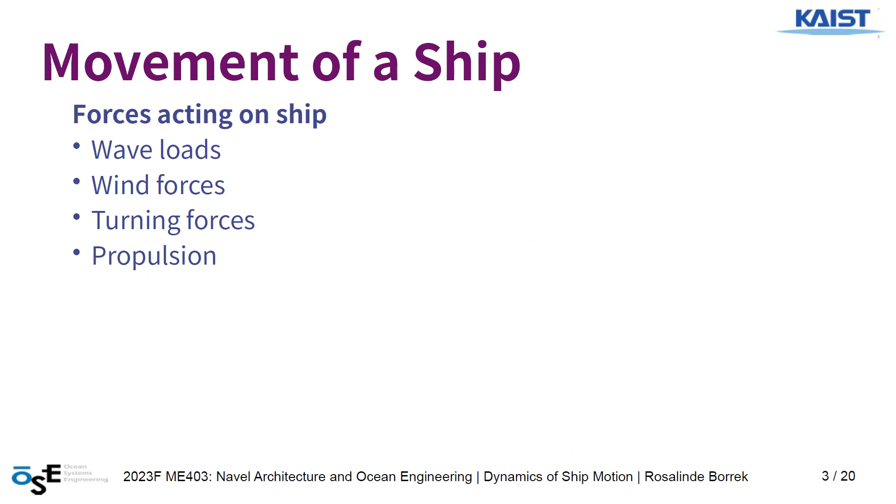Then the ship itself has certain parameters like its shape and its size and its weight. And all of those have an influence on the location of the center of gravity and also on the center of buoyancy, which we already learned earlier this week, that those two parameters are very important when it comes to how a ship is moving and how a ship is stabilized. So those factors influence how those forces make the ship react in a certain way.

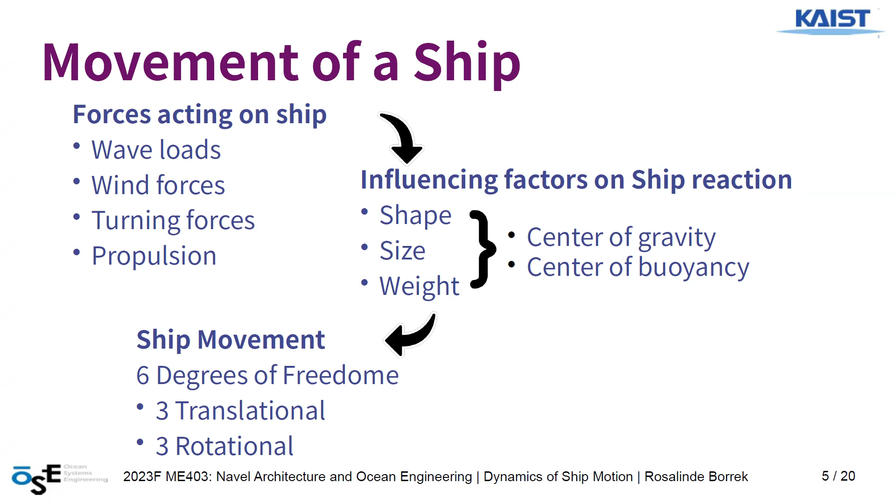And then in the end, we have the movement. The ship in the end is also just a 3D object, and as every 3D object, it also has 6 degrees of freedom in which it can move. So 3 translational and 3 rotational. And of those, I want to talk a little bit more now. But first, we have to define a reference axis so we can do that.

Now, for the origin point of the coordinate system that is mostly used, I saw some different literature. Some seem to use the center of gravity for the origin point. Some use like a very specific point within the structure. But then the axes were all defined in a similar way.

As in the x-axis, the longitudinal axis goes through the length of the ship, parallel to the waterline, while the y-axis or the transverse axis, or sometimes also called lateral axis, goes perpendicular to that, also obviously parallel to the waterline. And it is also defined that the positive y-axis side is the port side and the negative y-axis side is the starboard side. And then the z-axis is obviously the vertical axis going up.

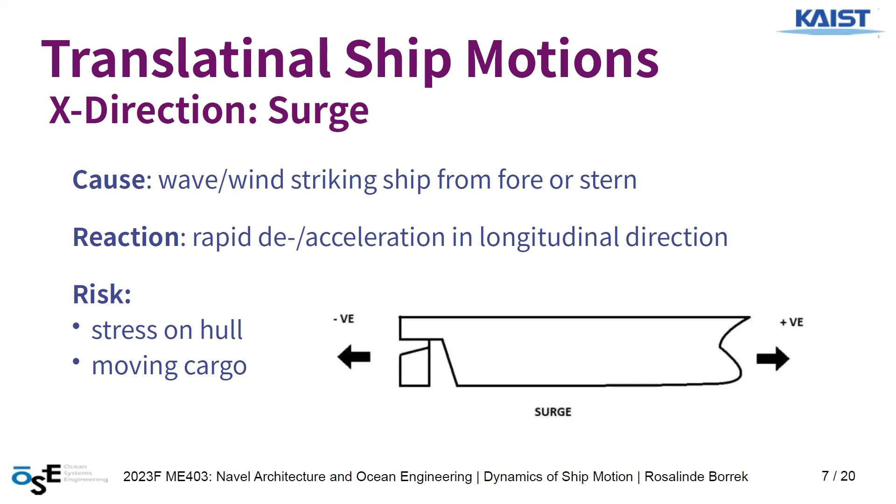Now we come to the motions. First, translational ship motions. Ship motion in x direction is called a surge. And it is mostly caused by wave or wind forces that are striking the ship from the fore or from the stern. And the reaction of the ship is then a rapid de- or acceleration in a longitudinal direction. And the risk of those motions is that it can cause a lot of stress on the hull. And it also can move cargo around if it's not secured properly.

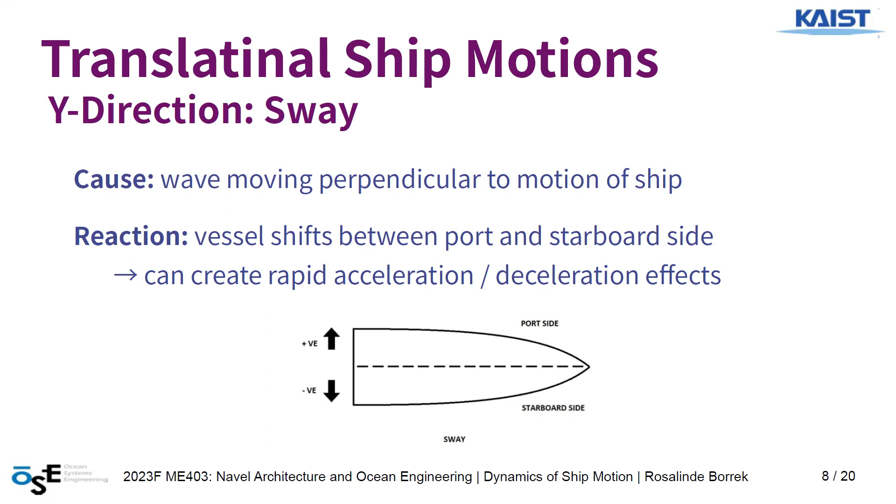Then translational motion in the y direction is called a sway. And this happens if the wave is moving perpendicular to the motion of the ship. And then the vessel will start to shift between the port and starboard side. And this can also potentially create rapid acceleration or deceleration effects.

Then we have the motion in z direction, which is called the heave. This happens when a wave strikes the ship along its path of motion, and it can create a force imbalance between buoyancy and weight. We already heard a lot about that in the last lecture. This then creates upward and downward motions of the ship. And again, similar to the surge, this can also create a lot of stress on the hull and also move around cargo that is not supposed to move.

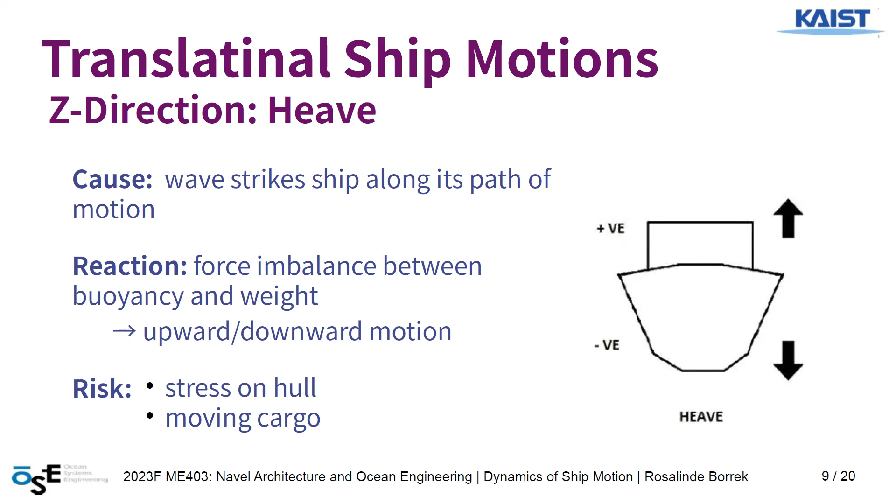Then we come to the rotational ship motions. First, the rotation around the x-axis is called rolling motion. We also already learned a lot about that in the last lecture. It can be caused by waves moving perpendicular to the ship motion, by wind forces, by cargo shifting, by a hard over of the rudder. A lot of different things.

The result is then a side-to-side rolling of the ship, which in the worst case can lead to capsizing of the ship. It can also induce a lot of inertial forces on the ship structure. And in the case of a ship moving passengers around, it also has to be noted that this can lead to a lot of seasickness, which is not so nice for the passengers.

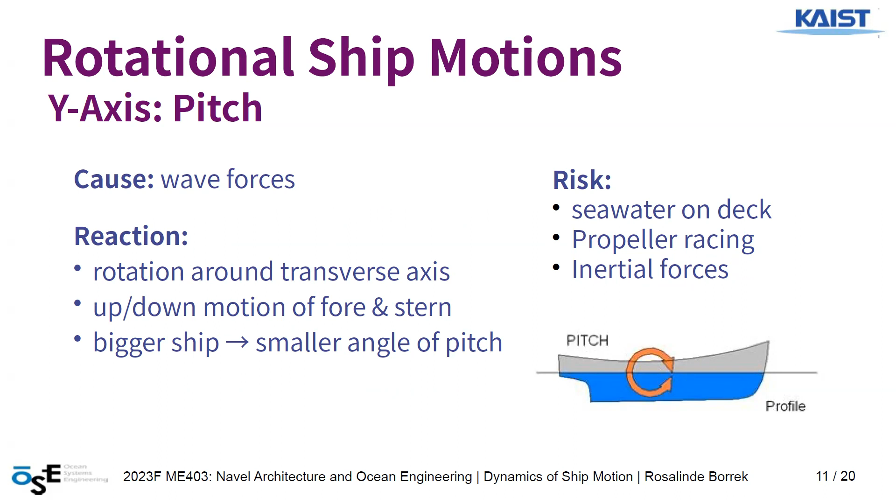Then rotation around the y-axis is called pitch. Again, this is mostly caused by wave forces. It is rotation about the transverse axis, which then creates an up and down motion of the fore and the stern. Generally, it can be said that the bigger the ship, the smaller the angle of pitch. It can lead to seawater on deck. It can also lead to propeller racing. And again, it can put inertial forces on the ship structure.

Then last of those, we have the rotation around the z-axis, which is called yaw. Again, the most likely causes are wave forces. Sometimes it also happens during vessel towing. The reaction is a spinning of the ship around its vertical axis. And since the ship then looks in a different direction, it can cause a course deviation, which you usually don't want because you want the ship to go in the direction you want it to go.

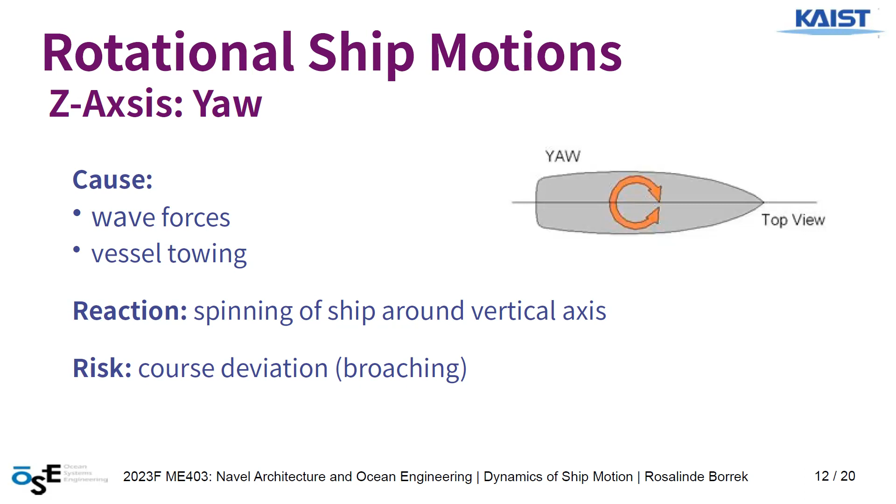Okay, those were the movements in the 6 degrees of freedom, but there are some other ship motions I want to talk about. One is hogging and sagging, and it happens if a wave moves along the length of the ship. As we also learned last week, at the top of the wave there's a higher buoyancy than at the bottom of the wave. So we have a different buoyancy along the ship's length, and this can lead to a curvature in the ship hull.

So if the wave is high in the middle of the ship and low at the bow and at the stern, we will have a hogging movement. And if it's the other way around, the waves are high at bow and stern and low in the middle of the ship, then we have a sagging motion. The risk is that the ship can start to oscillate between hogging and sagging quite fast, which can cause vibration, and this can lead to a lot faster material fatigue.

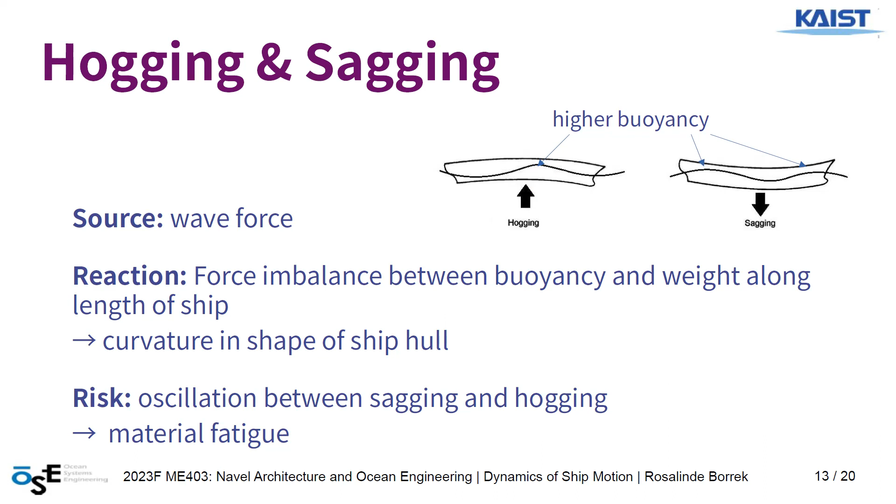And lastly, we have something called slamming, which again is induced by waves. What happens is that every time the ship strikes the water surface of the wave, there's a sudden deceleration. It can affect any side of the ship with heavy motion, but the most common form is bow slamming, when the front of the ship clashes with the waves again and again.

This can cause very, very high loads on the ship structure, and it has to be kept in mind when a ship is designed, because a ship has to be designed in a way that it can withstand those kinds of loads, even though they are not the standard loads that would happen on a ship.

Okay. Then I have a short summary of the effects different motions can have on the ship. First of all, motion always creates loads, and loads always have an impact on the structural integrity, then the material response, and lastly also on the stability, which is what Zian will talk about later.

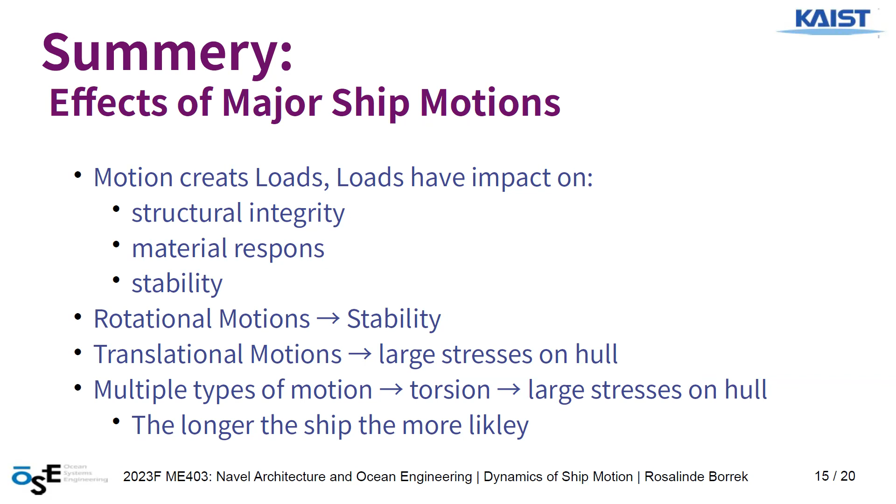Okay, then I want to talk very briefly about the topic of mathematical modeling of ship movement, because it is a very important topic. To be able to properly operate a ship, we need to know how it is moving and how it will react to different conditions. And therefore, simulation is a very important topic. Now, there are a lot of different models out there which do different calculations, ranging from kind of complicated to very complicated. So I cannot go over all of them.

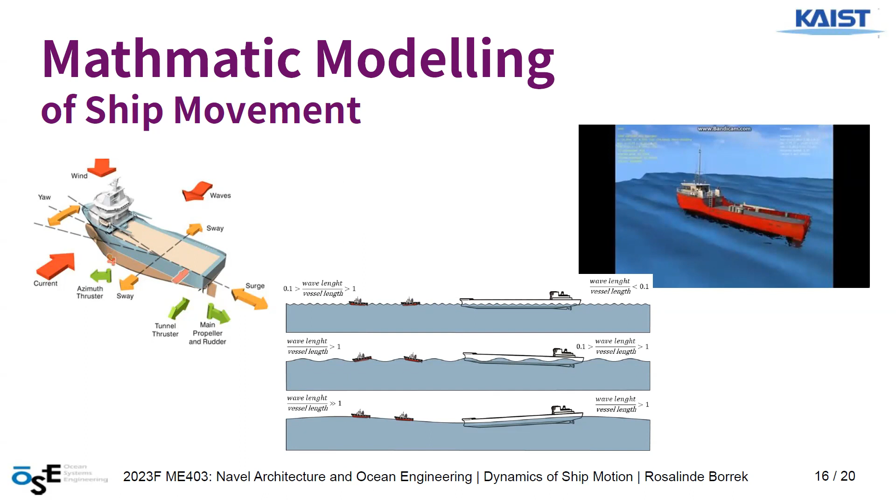The one I want to talk about right now is the MMG model. MMG stands for Maneuvering Modeling Group, which is the group that introduced this model. It was proposed in 1977 at the Japanese Towing Tank Conference. So it's not the newest model out there, but a lot of models are based on this model, which makes it still quite an important model. And there has been an effort to standardize the basics of this model.

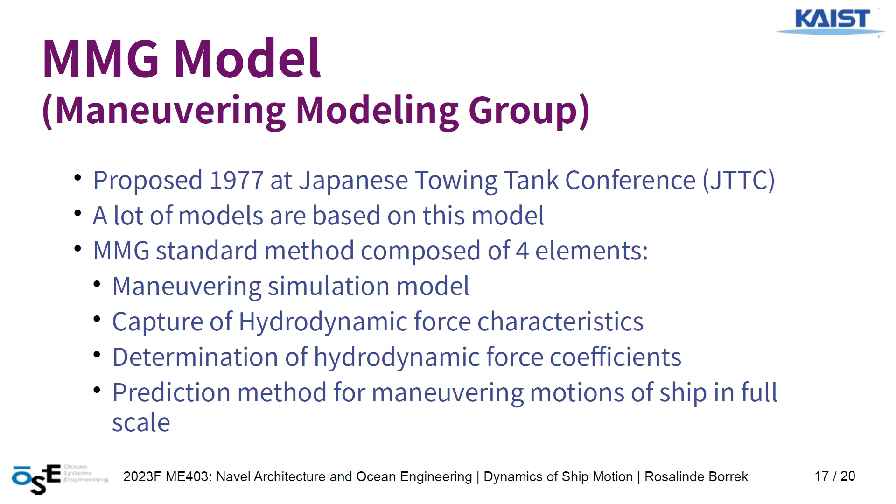The 4 elements of the MMG standard method are the maneuvering simulation model, the capture of hydrodynamic force characteristics, the determination of hydrodynamic force coefficients, and the prediction method for maneuvering motions of the ship in full scale, which brings it all together. Now, going over the whole model is a little bit much for this lecture, so I just want to talk very briefly about the core functions to explain the motions of the ship.

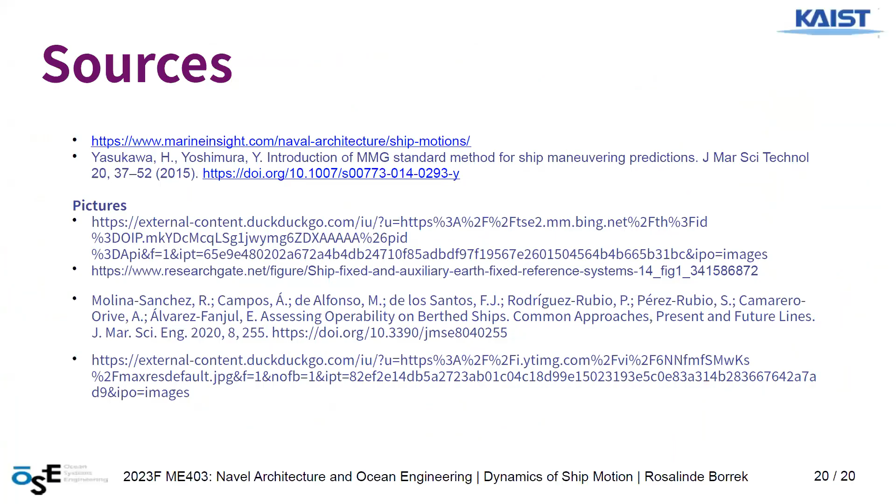From my previous lecture, small additional comments. One is about the equation of motion. This is very, very complicated, so let me show you. See, you remember this one from your mechanics? There is a spring mass damper system, right? You remember this one? And the equation comes like this one.

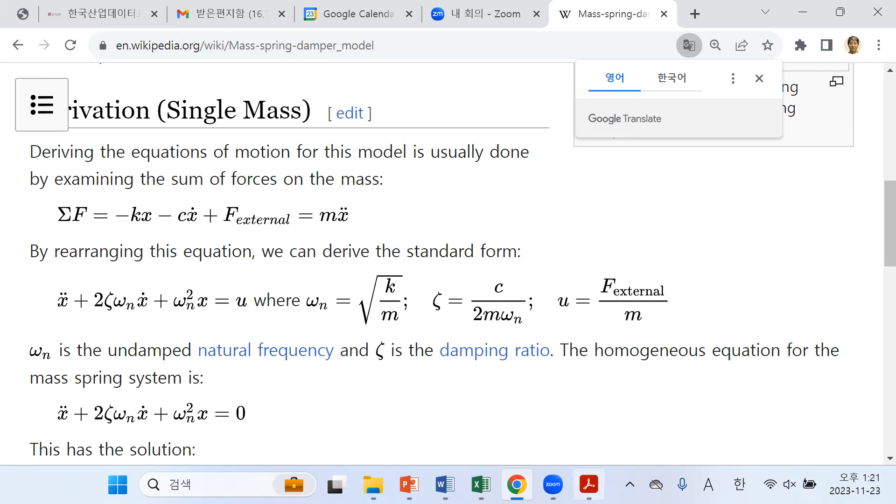Maybe another way. This is an inertia term depending on acceleration. This is a damping term depending on the speed, and this is the spring constant and displacement, right? And then external forces there. So if you move this one this way and this way, you can arrive at this equation. It looks like a complicated one, but this one is the acceleration term, this is a speed term, this is a displacement, and then external forces here.

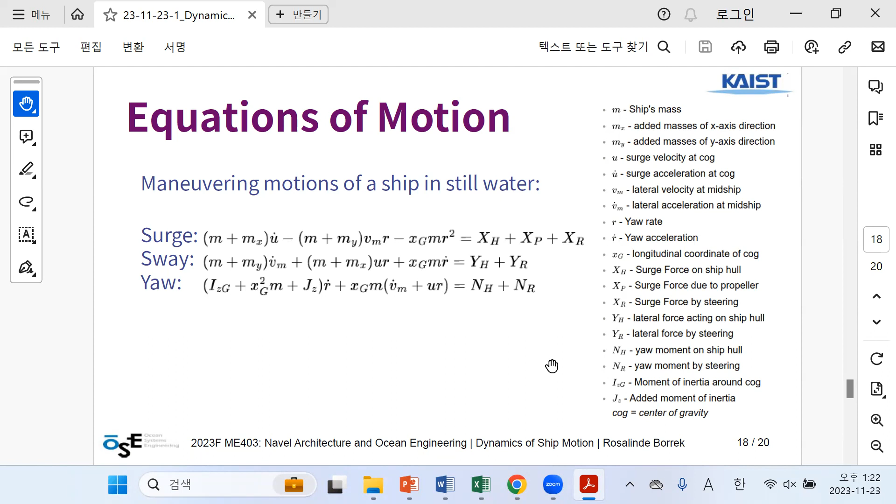Same structure of mass damping equation. It is for surge motion, this for sway motion, this for yaw motion. There are more because we have 6 degrees of freedom. But anyway, this is the inertia and mass term, this is the damping related term, and this is the spring constant term, and then external, that you can understand. In detail, it's a very complicated equation because a ship is big and complicated.

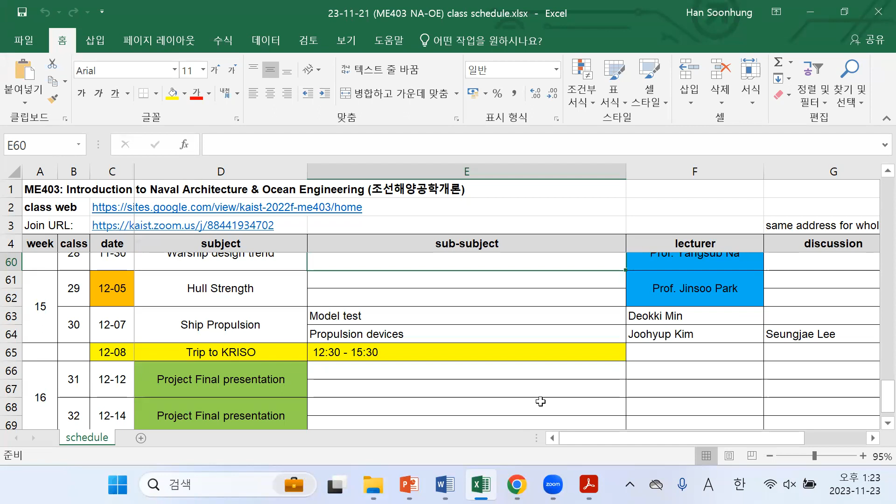All right, that's good enough. And then we can move on to Zeean. And we open this one. Right.

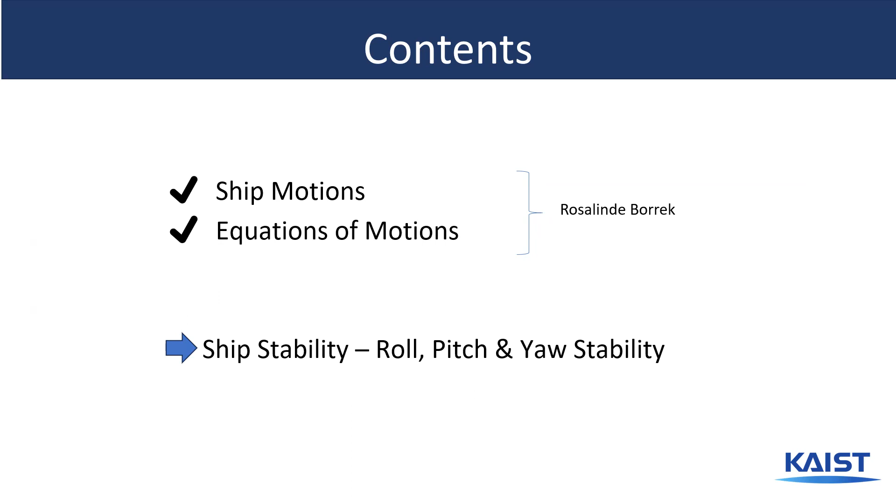Okay, hello everyone. My name is Yen, and today I'll be going through the second part of the lecture on dynamics of ship motion. Rosalinde has just covered ship motions and their equations. Today I'll be focusing on ship stability, particularly roll, pitch, and yaw stability. There are 6 types of ship motions: surge, roll, sway, pitch, yaw, and heave. We'll be focusing on rotational motions today: roll, pitch, and yaw.

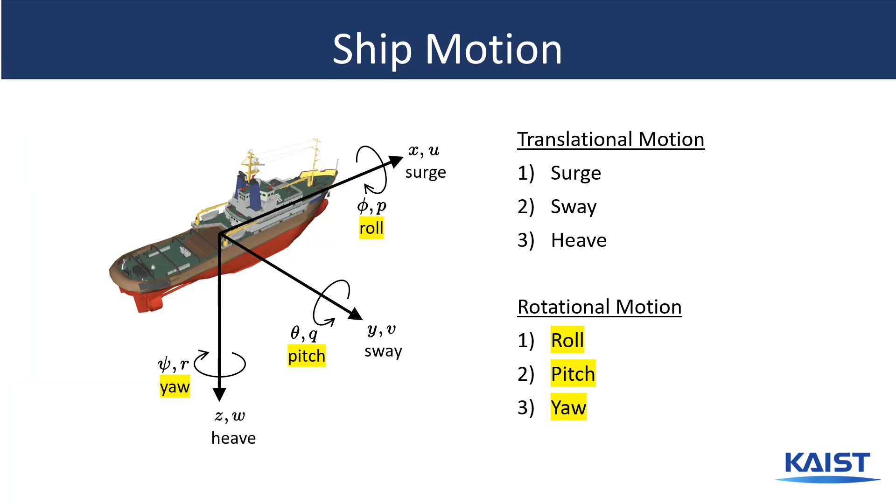So let's take a look at roll stabilization. A ship's roll is caused by the generation of greater buoyancy when the wave causes the water level on one side of the ship to be higher, causing the ship to lean to the other side. When you want to add a stabilizer to counter this roll, you need to look at how the tipping force is acting on the ship, and add a stabilizer acting in the opposite direction of the tipping force, and the magnitude of the force also matters.

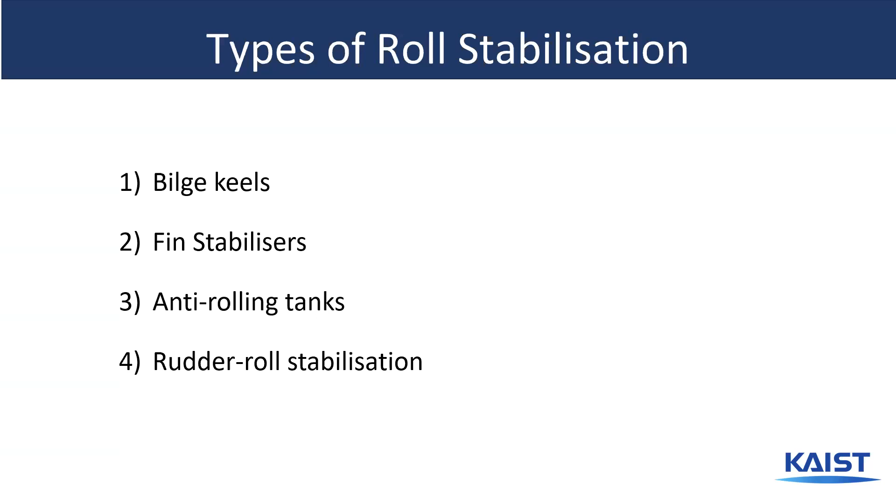These are some examples of roll stabilization methods: bilge keels, fin stabilizers, anti-rolling tanks, and rudder roll stabilization. I will go into more detail about these. First, bilge keels. They are a very simple design, approximately perpendicular protrusions at the bilges of the hull under the ship. When the ship is rolling and they move up and down, they create turbulence, which dampens the rolls created by the waves. This is a simulation to illustrate how the force is created by the bilge keels.

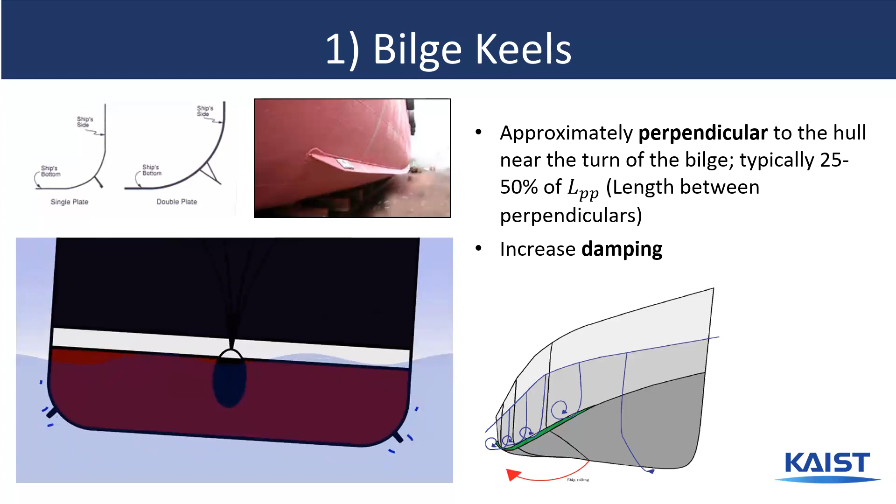The second method is fin stabilizers. They are underwater retractable or non-retractable wings at the bilges of the hull, and they can look similar to bilge keels; the difference is that you can change the angle of the fin stabilizer. In the simulation here, when we change the angle of the fin stabilizers, the water flow changes according to the direction the fin stabilizer is facing, and this creates the energy change according to that direction.

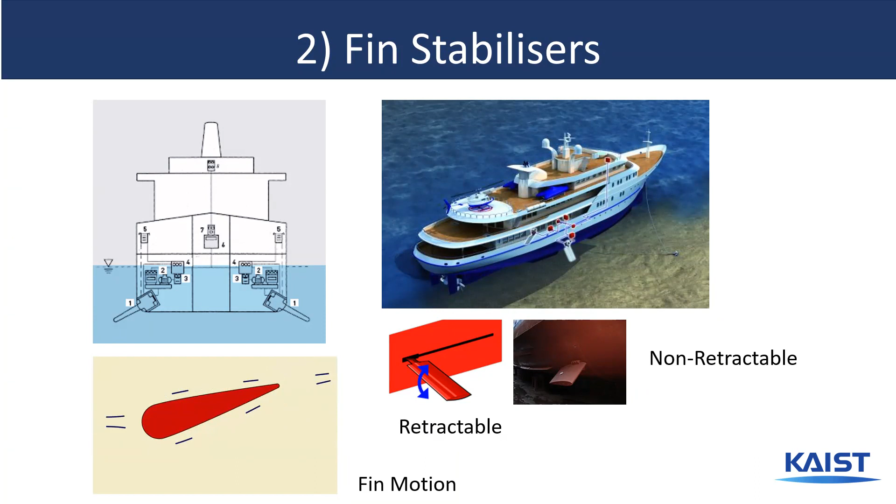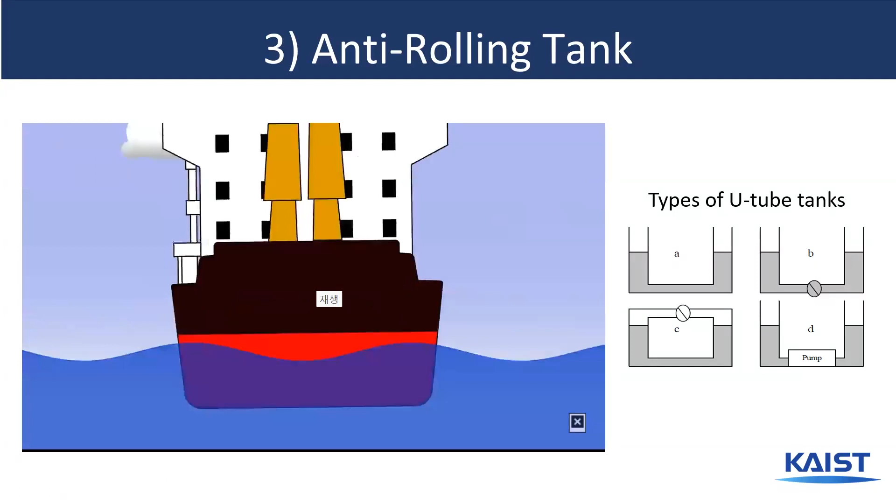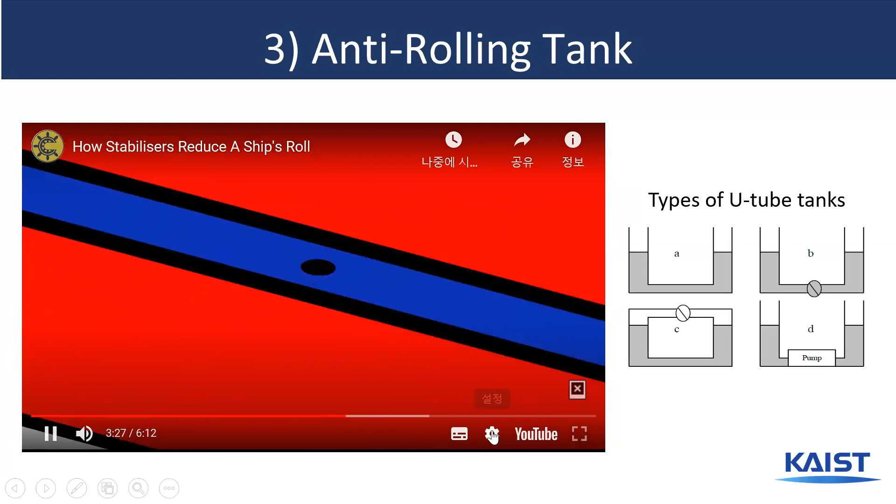Another method of stabilization is passive anti-roll tanks. These are tanks installed in the extremes of the ship's breadth. The key to these is in the design of the crossover pipes. Normally, with the ship upright, they're going to have the same amount of fluid on each side. As the ship leans over one way, the fluid in the low side is going to increase. If you can control the flow of fluid enough, you can have the maximum amount of weight.

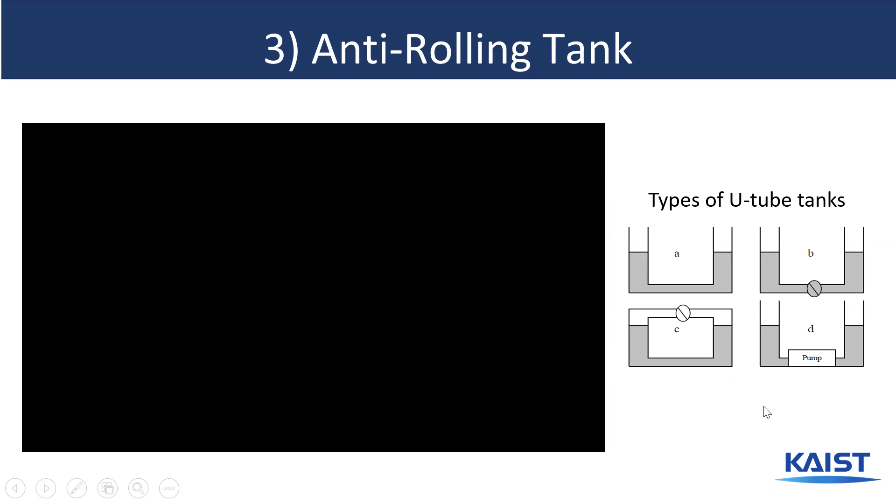Sorry. Hold on, give me a second. Okay, I will start again because it was very soft just now.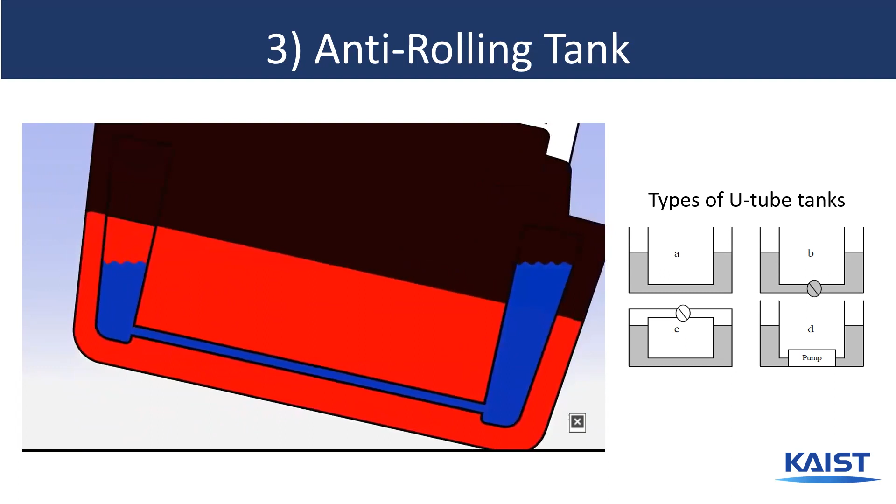Another method of stabilisation is passive anti-roll tanks. These are tanks installed in the extremes of the ship's breadth. The key to these is in the design of the crossover pipes. Normally with the ship upright, they're going to have the same amount of fluid on each side. As the ship leans over one way, the fluid in the low side is going to increase. If you can control the flow of fluid enough, you can have the maximum amount of weight in that side as the wave moves across the ship. Theoretically, if you keep the fluid there while the wave crest is there, it can help to counter the roll. Of course, you need to release it to let it flow to the other side at just the right time so that it's ready to counter the next wave crest as that approaches. You can add in more control onto these tanks, making them semi-active.

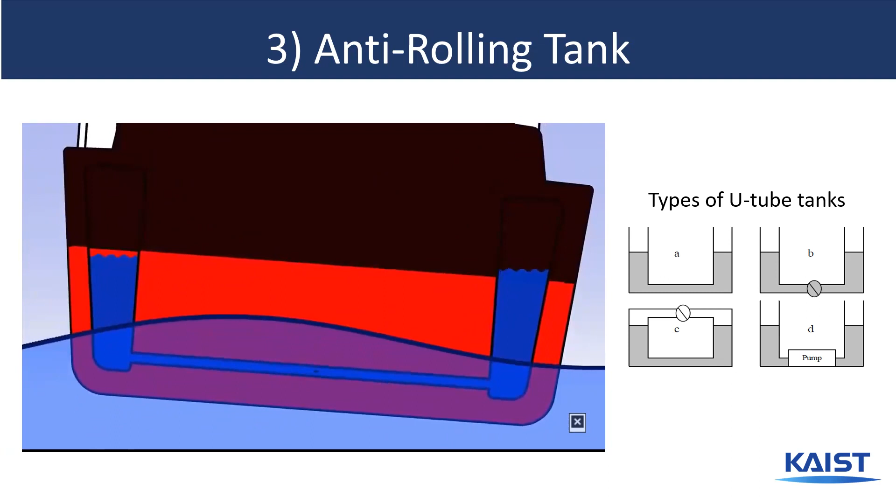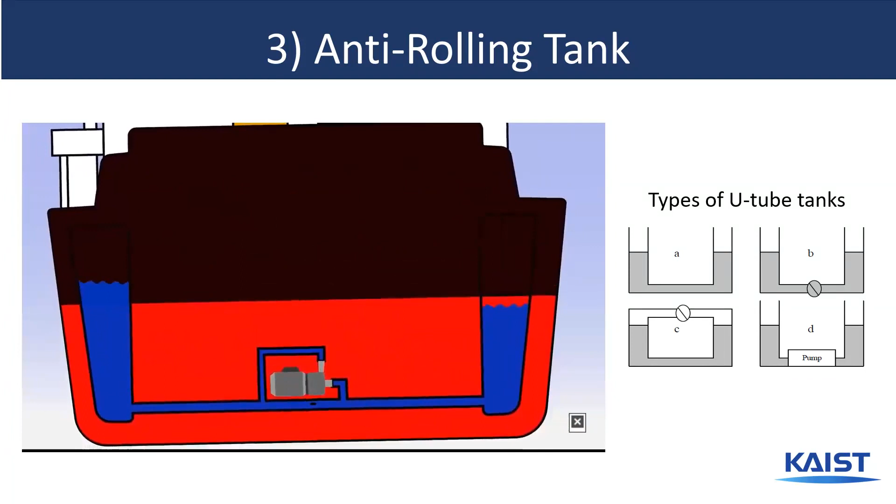Or you can even add in a set of pumps, controlled by a gyroscopic stabilisation system that can pump water across whenever it's needed. This would be a fully active system, and these sort of stabilisers are good on ships. They would work okay on cruise ships, as they can actively counter the force of the roll as it's happening. Unfortunately,

So the last but not least type of roll stabilization is rudder roll stabilization. It makes use of the movement of the rudder to create a roll moment which will counter the roll moment created by the waves to dampen it further.

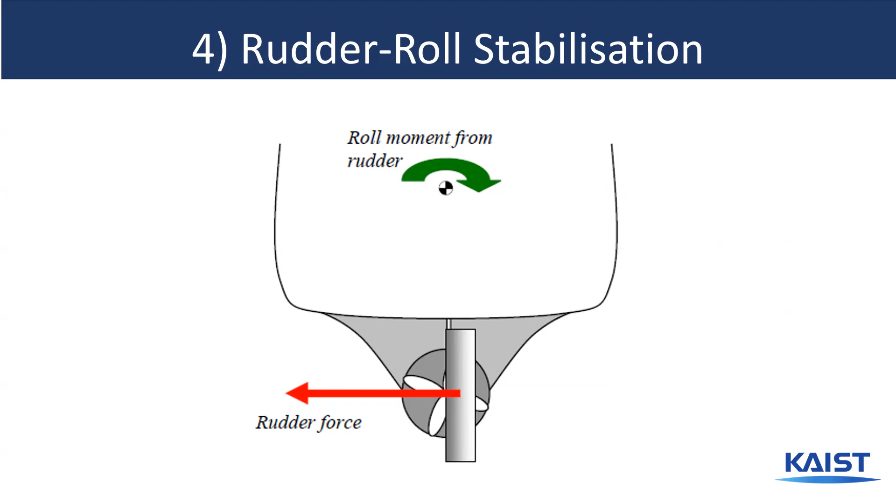So taking a look at these 4 types of roll stabilization and comparing their individual benefits and challenges. For bilge keels, they can be simple and inexpensive to install, but the disadvantage is that it increases hull resistance. For fin stabilizers, it can be highly effective in countering the roll motions of the ship, but it can only be effective at high speeds for ships, and it can be very expensive to implement.

For anti-rolling tanks, it is very effective at all speeds, but the challenge is that it requires a large space and weight to implement. And lastly, for rudder roll stabilization, the benefit is that it requires a relatively small space, but it is very ineffective at low speeds, same as the fin stabilizer, and it requires a highly capable steering system to implement. So each of these stabilizations have their own benefits and challenges.

So it depends on the type of ship, the size of ship, and also what speeds do they need in their course to consider what kind of stabilizer you need for that ship. But oftentimes, the stabilizer is already implemented for the type of ship. So they just have to choose the type of ship, and the stabilizer will be in the ship.

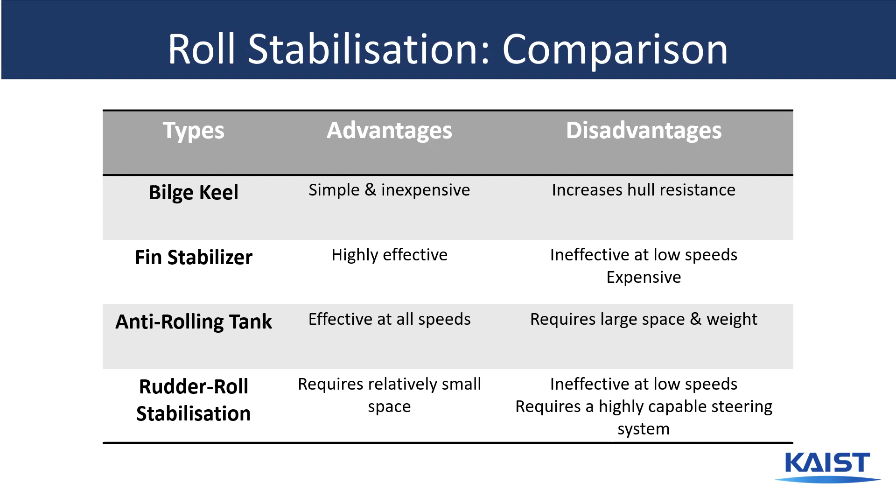So there are also other roll stabilization ideas, such as the spinning gyroscope, which was implemented first in the 19th century. And for the Bessemer saloon, it does not actually directly counter the roll motions of the ship, but what it does is that it creates a system that allows the passenger cabin to be installed on gimbals so that it can be placed horizontally when the ship is moving. So it actually allows the passengers to be prevented from suffering from the impact of the ship roll motions. Yeah. So it's a very interesting concept.

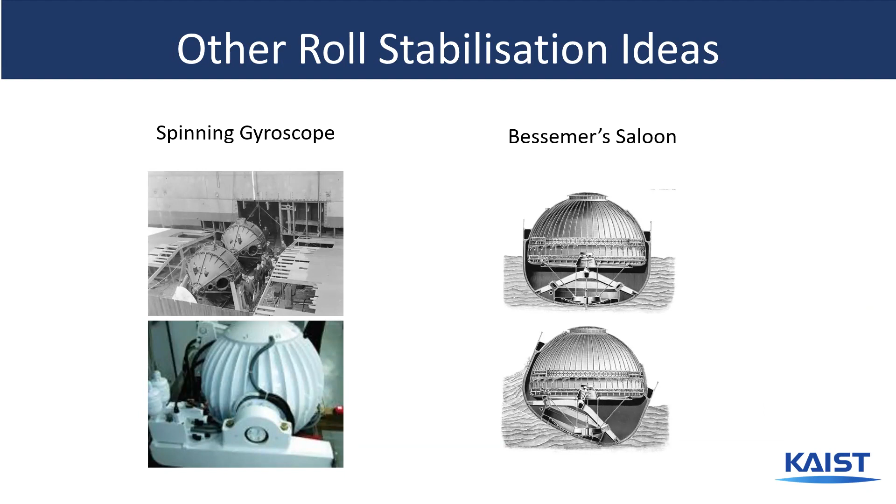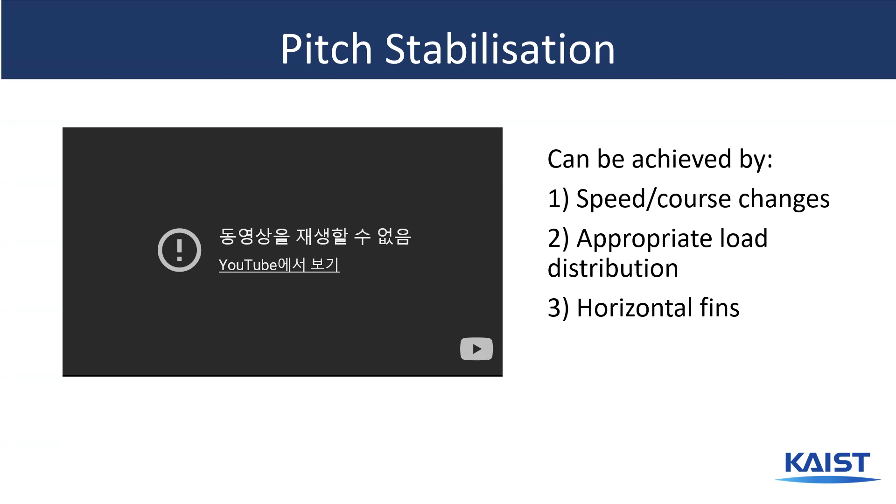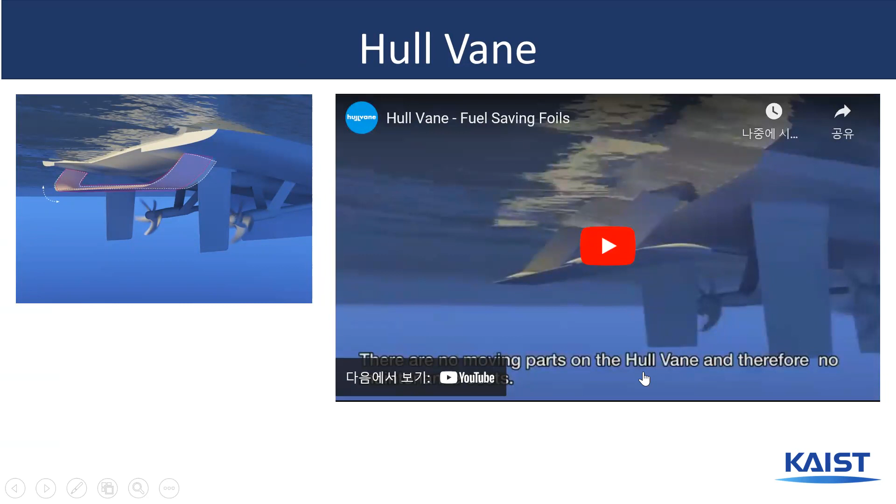So to counter this, pitch stabilization can be achieved by changing the speed or the course of the ship, or if you distribute the load appropriately on the ship, and you can also use horizontal fins to counter the motion. So one very good example of pitch stabilization is the use of hull vanes. It is located at the aft of the ship, and I have a video here to explain the use of the hull vane.

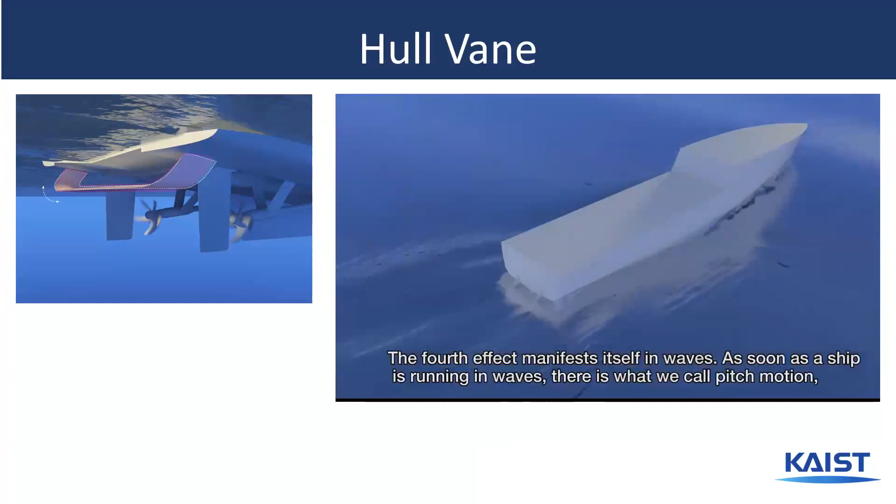Fourth effect manifests itself in waves. So as soon as the ship is running in waves, there is what we call pitch motion, which is this type of motion, and there is a heave motion where the vessel goes up and down. And the wing dampens that motion. And because the motions are dampened, there is also less resistance or less drag, because pitch motions cause a lot of extra resistance. There are no moving parts on the hull vane and therefore no maintenance.

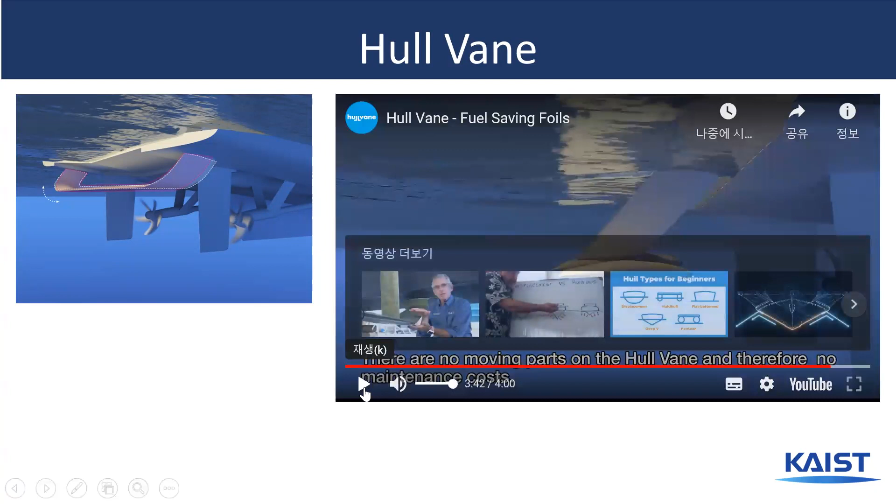Okay, so other than pitch and roll stabilization, there is also yaw stabilization for the yaw motions of the ship. And some examples are trim by the stern, rudder steering, and the implementation of anti-yaw skeg. So trim by the stern means that the draft is higher at the back than at the bow of the ship. So when the ship is higher at the bow, it reduces the resistance when the ship is moving through the water, and it helps to create a smoother and a more stable journey, allowing for yaw stability.

For rudder steering, it controls the direction or the heading in the water, allowing for the adjustment of the ship's course, and it helps with yaw stability, since you can change the course of the ship. And for the anti-yaw skeg, it is a very special design of the ship, whereby it can help to control the flow of water around the stern of the ship, which can help to reduce turbulence and disturbances around the rudder of the ship, thus increasing yaw stability.

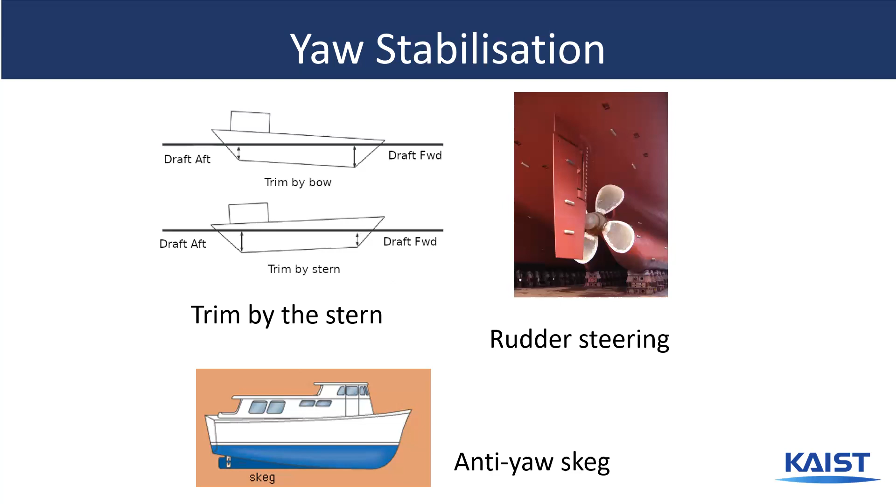So there are different types of yaw stability. There is straight line stability, directional stability, and positional stability. Straight line stability means that when a ship is hit by a disturbance, it continues in a straight line in the direction that it is now facing.

For directional stability, it means that when a ship is hit by a disturbance, it changes its course of action, but it remains in the same direction as before. And for positional stability, when a ship is hit by a disturbance, it changes its course of action, but returns to the same direction and the same position it was facing before the disturbance. So these are the different types of stability, and the last will be unstable, which is the first one over there. It completely changes its direction and position, very off the original path.

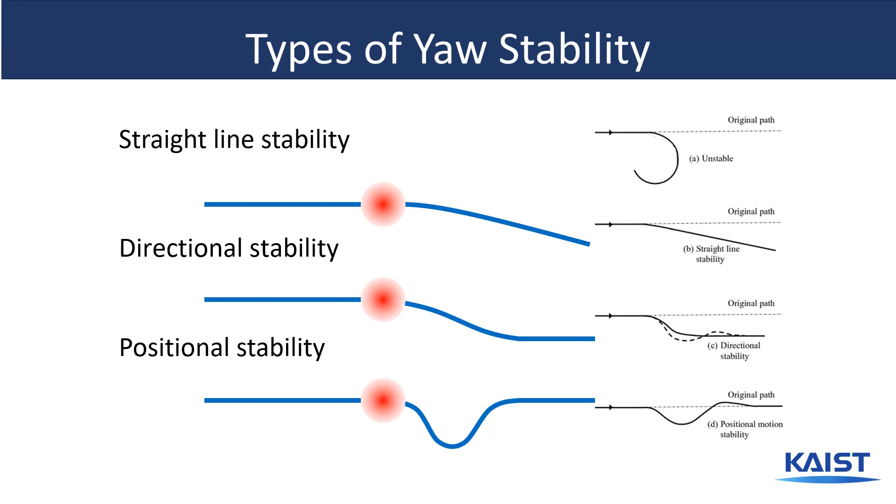So other than stability of the ship, we can also take a look at the maneuverability of the ship, which is the capability of moving a vehicle out of its equilibrium state to a desired state. One example was the one I was talking about, which was positional stability. And if you look at the relation between stability and maneuverability, they are not exactly opposites, but they are like a trade-off of each other.

A stable vehicle tends to stay in equilibrium and is difficult to maneuver, while on the other hand, the more maneuverable a vehicle is, the easier it departs from equilibrium, and the less likely it will return to the equilibrium state.

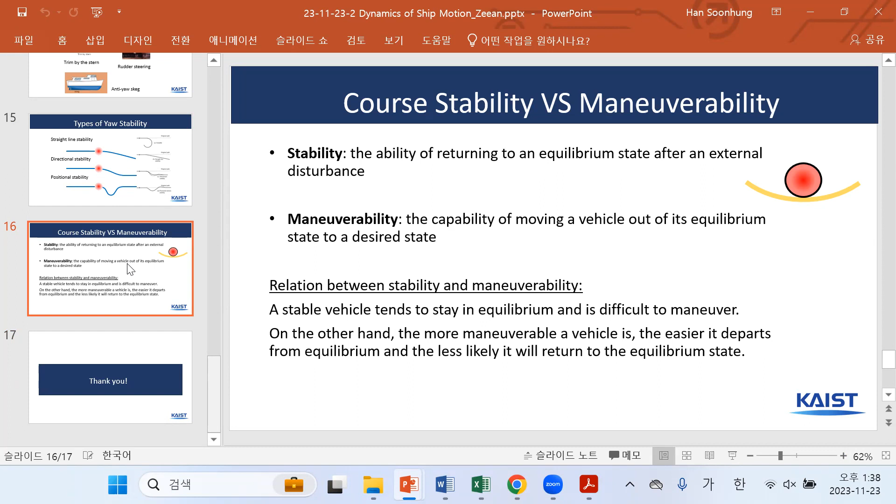One is this one, the course stability. As he's saying in this slide, the upper line is saying course stability, not ordinary stability like horizontal stability or transverse stability. This is course stability. But for this one, if you are trying to design control software or an autopilot, you know what autopilot is? Autopilot is very similar to an unmanned car. Autopilot is popular for airplanes. Okay.

The human pilots do not work during the main flight. They are only involved in takeoff and landing. During the main trip, the autopilot is working. But if you want to make software for the control of an autopilot, you need to decide which one is better for your mission. So if you want to drive in, say, a street, you need to keep in the lane, then you need to have positional stability. Once there is a small disturbance, you need to return back to your lane, right?

But if you have something like an airplane in the big space or a ship in the ocean, then you don't need to return back to your lane, right? So probably this one is better for that case. But depending on the mission, you can choose your software development directions.

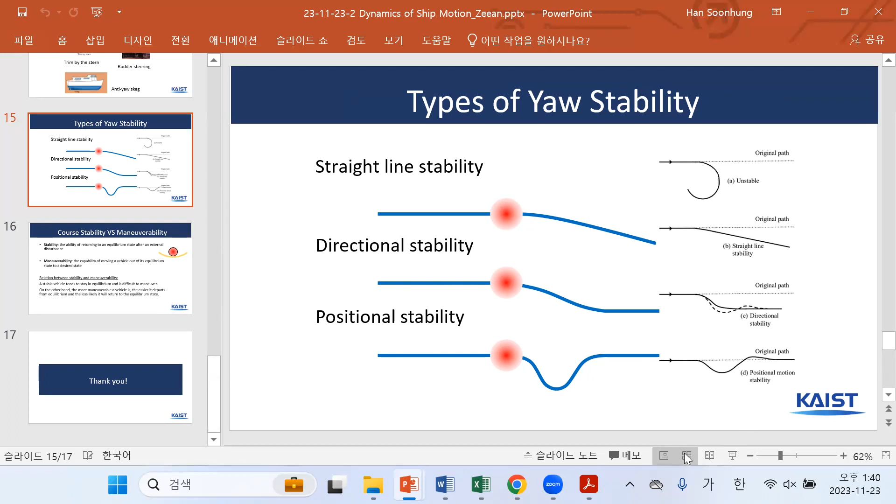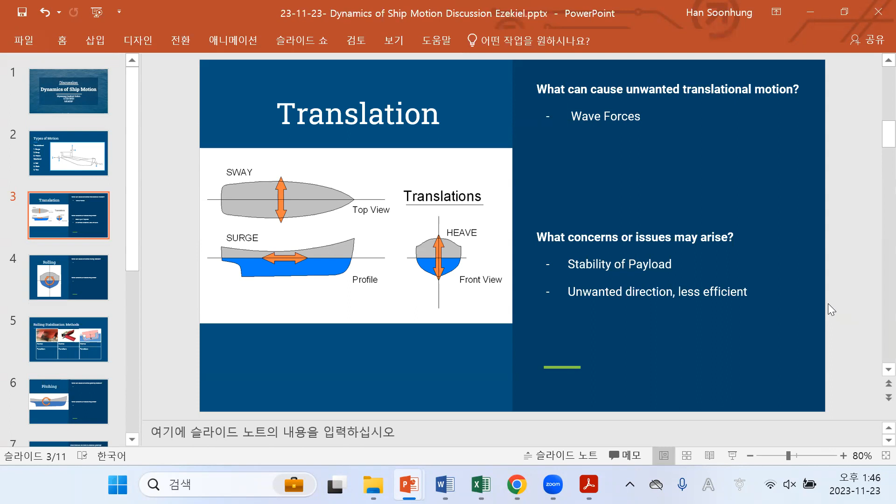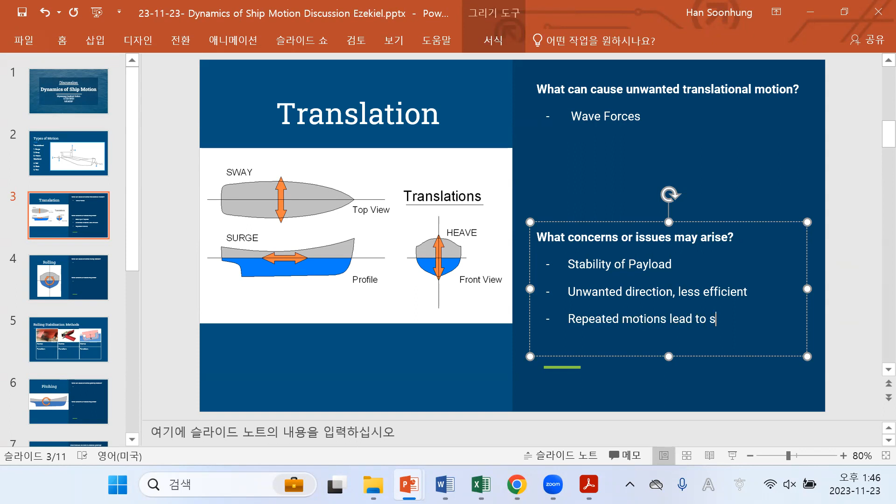Right. Let's see. I guess it wasn't really quite covered in the slides very well, but actually, no, sorry. Can you perhaps think of something that this sort of translational motion might have on the ship itself, if it's constantly undergoing the same motions? High stress. Right. Damage. Right.

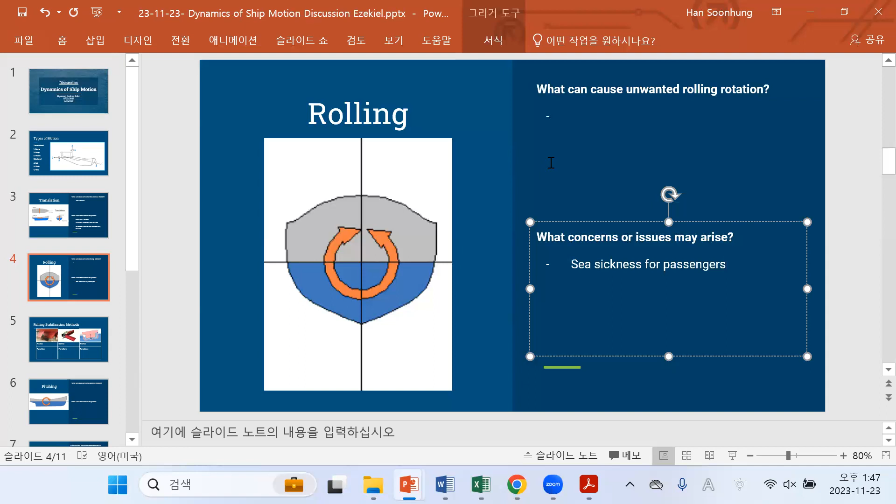So rolling motion along that x-axis is going to be caused by similar things, right? That similar wind and wave motion. In this specific case, I suppose it would be the beam waves. Okay. Can we think of any reason why this specific axis would cause issues? Sickness? Right, seasickness. Yeah.

I guess we can move on. I guess this is the more important part. Here I have three of the different methods that were proposed for stabilizing a rolling movement. Can you perhaps give me the names or how any of these methods work? Does anyone remember? For the first one, when the boat is going to roll, it will enhance the damping, the movement of the water. It dampens the rolling movement by generating turbulence. Yep.

I could just give you the name for that one. This one is the bilge keel. There we go. Does anyone remember how the other two work? For the second one, it's very close to the wing of an airplane. So it will move the water and flow in a specific direction to uplift or negative lift. So that's the fin. Yes. Thank you.

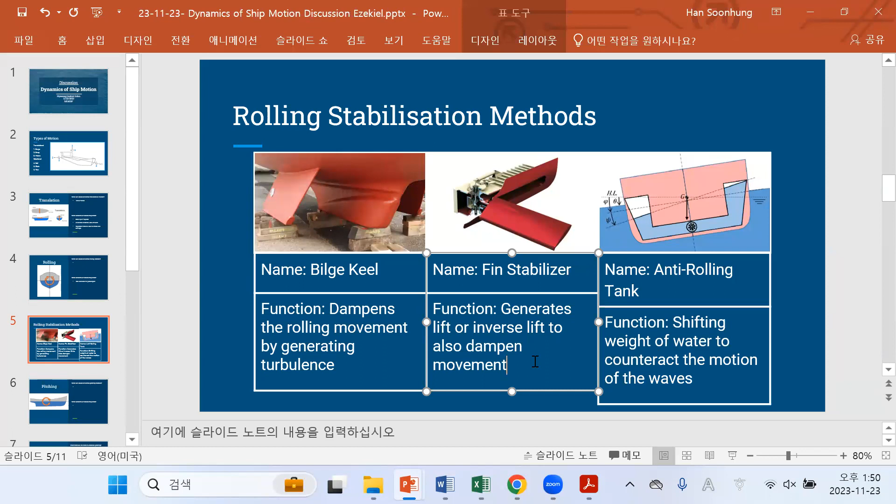Now, one thing I would like to ask is, out of these three, which one do you think would be ideal? Which one do you think would work better? Can you think of any pros or cons for any of these options? So for the pros of fin stabilizers, it's really efficient. But for the cons, it's not efficient at low speed. I think it's more complex to implement. Right. Whereas bilge keels are easier to put just on the hull, but of course are less efficient. Right.

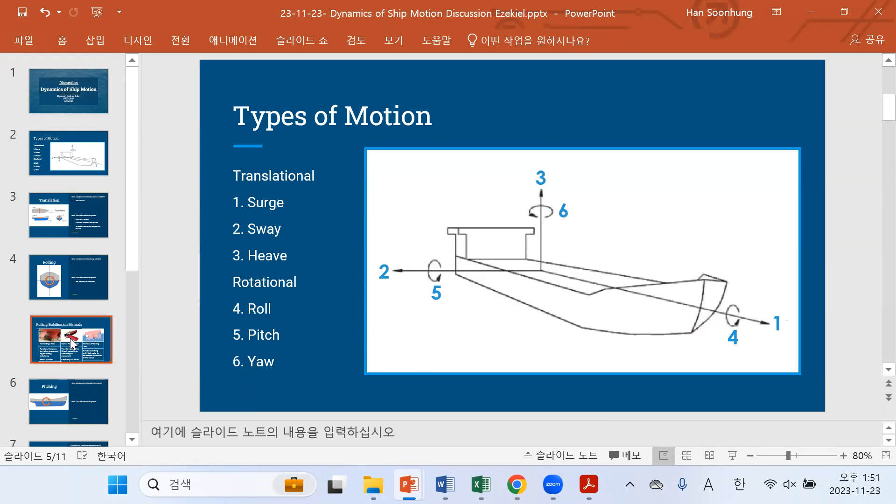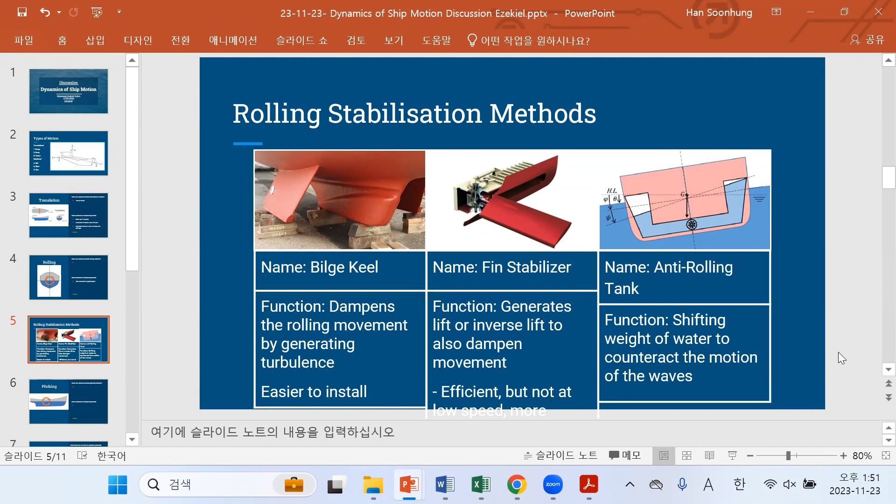Shoot, I did not give myself enough space. Okay, there we go. Can you think of any reason why we might want or not want the anti-rolling tank? It should be space consuming. Right. It takes up a lot of space and weight. Oh my goodness. It's fine. Let's move it all up. Sorry. All right.

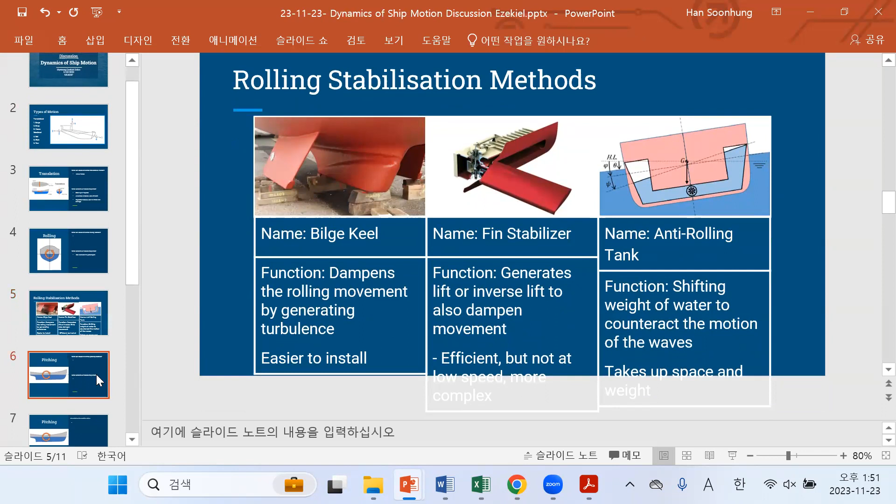So once again, pitching will be caused by similar wind or waves. But can we think of any reason why pitching specifically would be dangerous or unwanted? Passenger sickness. Yeah, absolutely. It would absolutely make passengers feel seasick, even more so than rolling, actually, right? Because it's an even wider radius. There's a lot more movement there.

Can you think of any other reason why pitching? Well, I was thinking about slamming. Right, absolutely. Pitch slamming. That can absolutely cause a lot of damage to the hull, which obviously is not ideal. So with the pitching motion, it can also happen that a lot of seawater can get on the deck. Right. It risks getting seawater onto the deck.

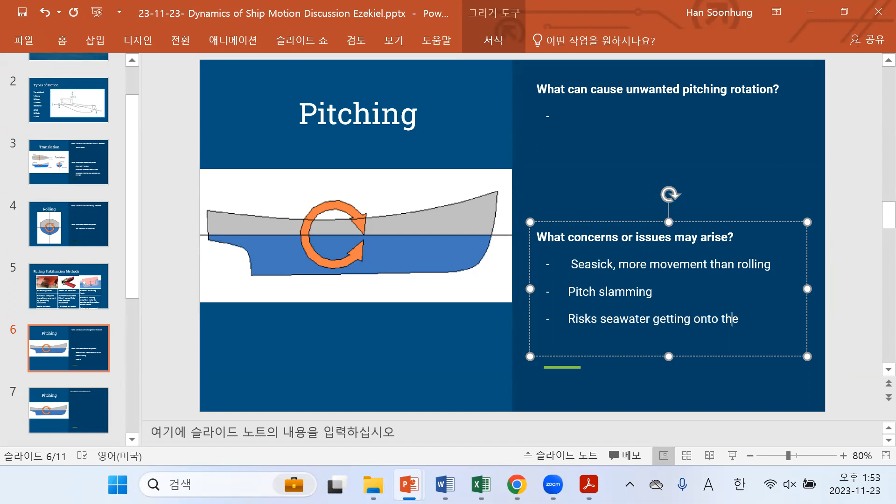Oh, that's very small. Okay. I don't know why that took so small.

But now, if I may ask, would it work as well for pitching as for rolling? Because you probably want to be moving forward, right? Will that work as efficiently, do you think? No, that's fine. It's totally fine to not know. It can work just in the right configuration. I believe Diane mentioned that once. All right.

And then for pitching, the main real cause of pitching is taking on waves head on, right? Is there anything we could do to perhaps minimize that happening? If we know that the waves come from a certain direction because of the location of the weather or something, we can try to change the route in a way that we don't go directly into the waves, but maybe have them more from the side or from another direction.

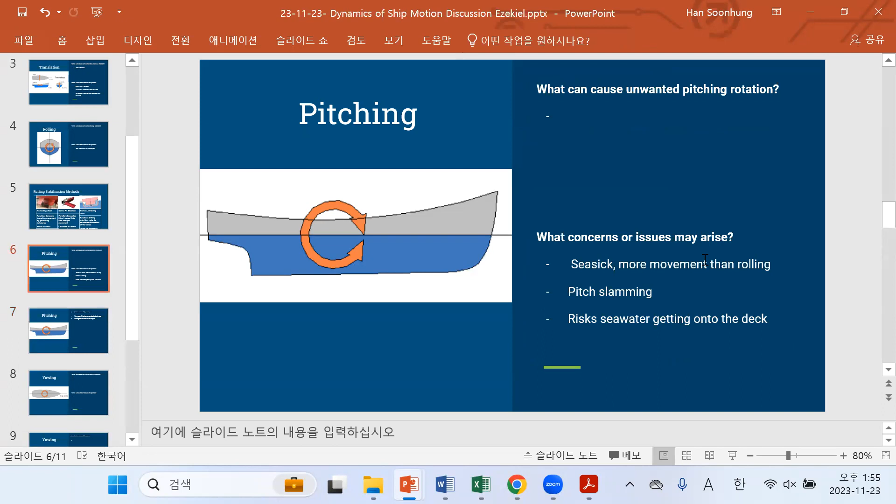Right. And I suppose we can address one of these things. Is there anything that we can do to prevent seawater from getting on deck, perhaps? I don't think you can avoid seawater coming on deck. You can make it easy for water to leave the deck after, so make some hole structure for water. Yeah, sure. I suppose you could just say like a drainage system then.

Right. Well, that is an excellent idea. I believe a common response is also to raise the walls of the ship a little higher as well, especially at the front and the back. So just giving it a little bit of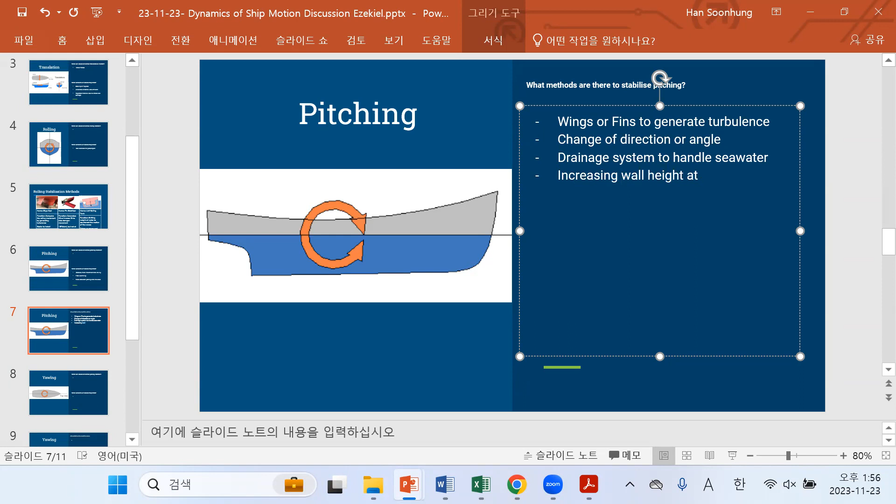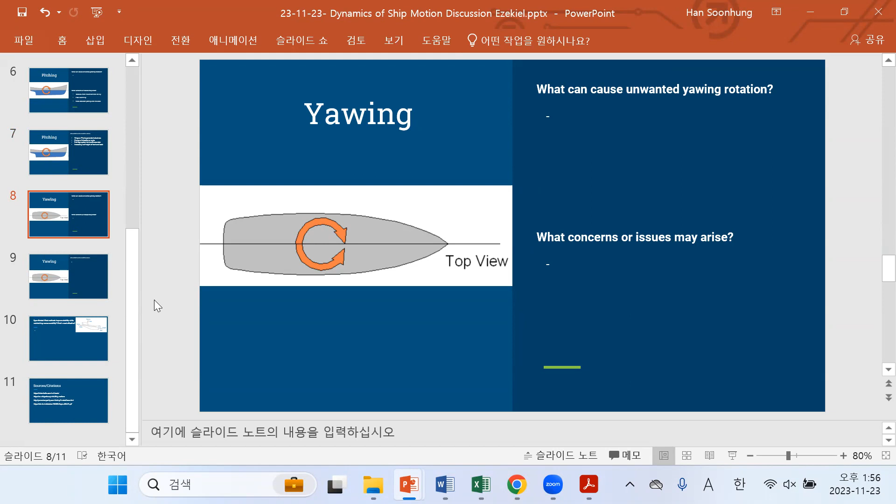All right. So can you think of a situation that might cause yawing to occur, a yawing rotation? Right. Waves, but also vessel towing. But primarily vessel towing is probably going to be the more active situation. So in vessel towing, you can think of it kind of like a chain, right? What do you think will happen if there's a slight deviation? What issue might come up?

If you are not monitoring it, you can go in a direction thinking that you're in the good direction, but you are in the wrong direction. Once it starts turning into the wrong direction, especially if it's being towed, that force isn't going to be pulling on it straight on, right? What do you think might happen if that turning motion and that pulling motion aren't linear anymore?

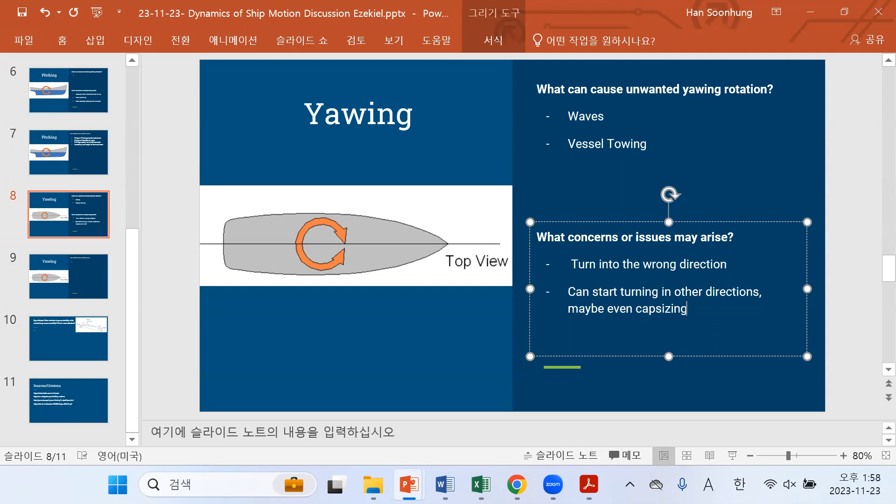It can then cause moving also in other directions. Right, it could start turning in other directions. In the worst case, it could also be capsizing, if the force comes really hard from that direction. Right. Can we think of anything that would specifically help against yawing?

Like sometimes you can swing the direction to just make it stop. Right. I believe we could say like rudder. Right. Can you think of anything else? No. Right.

So now let me give you a bit more of an open-ended question. The previous ones were a bit dry. A lot of these methods do help with stability, but they also hurt maneuverability, right? It's stopping that unwanted motion, but it's also fighting against us when we want that motion to happen. Can you think which methods are perhaps better or worse to implement so that we maintain maneuverability without losing that stability?

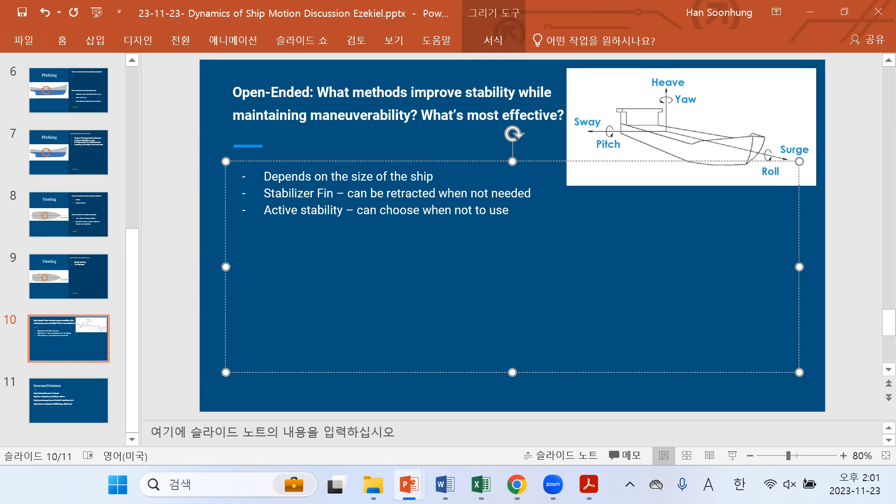Question, I may say you can use a big rudder. A big rudder can help turnability, and also course stability; both can be obtained using a big rudder. But if we cannot use a big rudder because of the water depth, you may use two rudders then.